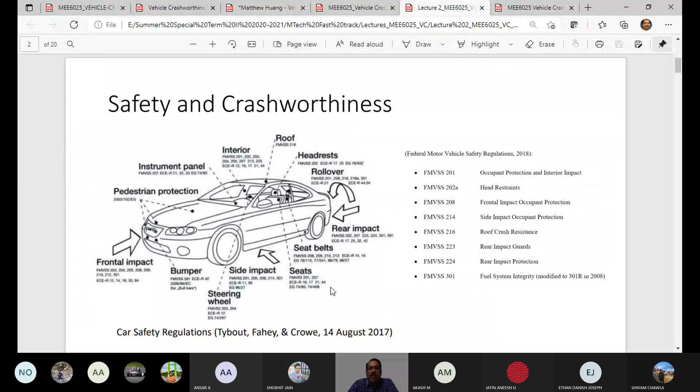And you see what crash tests are. Crash tests are guiding the vehicle with the required impact velocity, hitting the rigid barrier or deformable barrier. So you see in this figure, this crashworthiness test for government star rating, the star safety rating system for new model cars and trucks, formerly known as the New Car Assessment Program. So that is what we were seeing like this.

It was started in the 1970s in the US, and in our country we had this new car assessment program called Bharat Safety Program, implemented in 2017. We have different agencies, like ARAI is one part of it.

And you see also here side impact test, where your vehicle is held and then this barrier is forced to hit on it. So what is to be noted in this is the environment of the crash test. This environment has the instrumentation, high-speed cameras, and your vehicle is completely instrumented.

You would have dummies placed inside the vehicle, instrumented, and you see the responses measured in various parts of a human dummy that would reflect the severity faced by the occupant, and you would be able to calculate the severity index. I say these terms, but we will go ahead in our lectures on how they are calculated and so on.

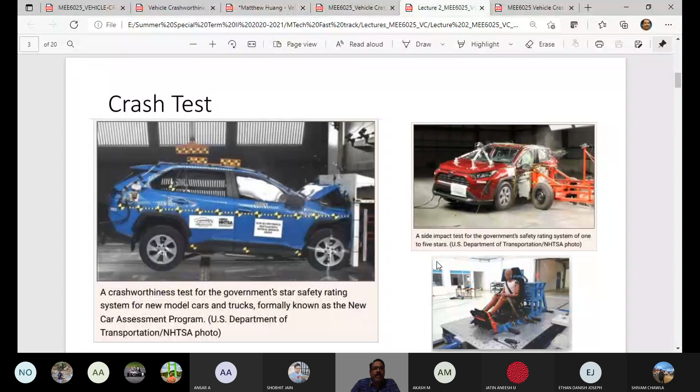There is the New Car Assessment Program, which I was telling you, 1978 was the first New Car Assessment Program, conducted by the United States. There are many other countries that also conduct their own New Car Assessment Program for new vehicles manufactured in their country. So we have the Bharat New Vehicle Safety Assessment Program. This started in 2017 and is still going on to realize its complete establishment.

So what is this Bharat New Vehicle Safety Assessment Program? It has been proposed as the New Car Assessment Program for India. Cars sold in the country will be assigned a star rating based on their safety performance. How is this safety performance evaluated? It is evaluated based on standard tests where ARAI has these test facilities mentioned. You can go through the website and see these facilities and their specifications.

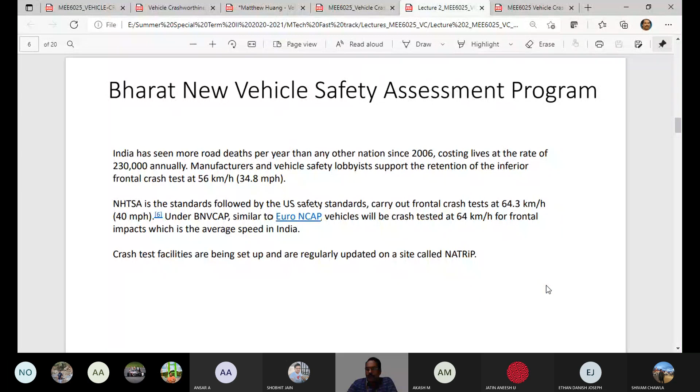One can take up such work as J component work and see this program's guidelines, how the tests are conducted, the test environment. So you develop your knowledge in that, and that would also be one of the topics for your J component assessment.

And when you come to vehicle collision models, why do we have to have vehicle collision models? To carry out such a crash test, facilities are required, and that would be possible by the government agencies. Also, OEMs can have that test facility. However, finally, the authority who is going to approve the vehicle for its safety performance during crash is these government agencies like ARAI in our country.

So most of the OEMs and other vehicle manufacturers do have their laboratory set up for component level testing, even for full car level testing, doing the test for internal purposes before taking it for certification. They do have, on the other hand, simulation facilities. And when you look at the simulation facilities, the vehicle collision models are quite interesting models. Many researchers have published articles, and people use their mathematical modeling for assessment of crashworthiness.

We will go through the vehicle collision models during our lecture. We have one separate module for that. We will see them in detail. I just have put it here to have a feel of what it is. So we can have linear impulse and momentum and energy principles from mechanics fundamentals.

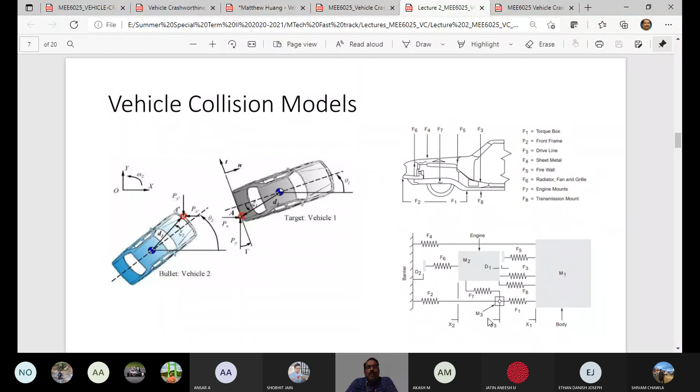Anthropometry is how the driver's physical dimensions and the vehicle dimensions are all arranged so that he would be comfortable enough to take the necessary action to avoid hitting a pedestrian. If the driver comfort is not there, if there are no appropriate ergonomics in your vehicle, then the safety of pedestrians would be a question mark.

So there are some aspects of pedestrian safety that we will be studying in detail, and these are the points we will be focusing on, listed here. If you look at pedestrian safety and ergonomics, you see the seating posture of the driver. You can see there are five here. Let's see one by one how they would be useful for ensuring the safety of pedestrians.

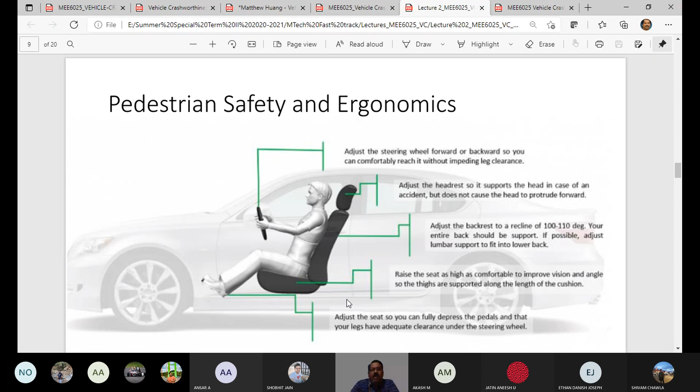I have just put these slides together from Google; I have taken many pictures and organized them for today's lecture so that it gives an overview of our syllabus. So you can see these crashworthiness restraint technologies. In a vehicle, these are all there.

In an advanced vehicle, you have automatic door locks. Once you start, it ensures that your doors are locked, so at any point of time, especially during a collision, your doors won't open and you won't be thrown out. That's very important, so automatic door locks are important.

Driver and passenger front airbags, dual level. Earlier it was only for the driver. Now it's made mandatory: the front seats compulsorily should have an airbag, so your airbag could deploy in an unavoidable situation.

And you can also see the passenger sensing system. So this passenger sensing system would be useful to see the surrounding environment of your vehicle. And you have here the rollover capable head curtain airbag. So airbags do not only come from the front, you also have them on the side of your vehicle, so that during side impact the airbags will deploy.

And you see on this top figure, the belts are the important restraint system. So as soon as you get in your vehicle, the first thing you have to do is put on your seat belt, and then you should start your vehicle. So these lap and shoulder safety belts are very important, and then the belt comfort guide. So these are pre-tensioner belts, right? And the energy management system. So these are all already available in the vehicle now, right?

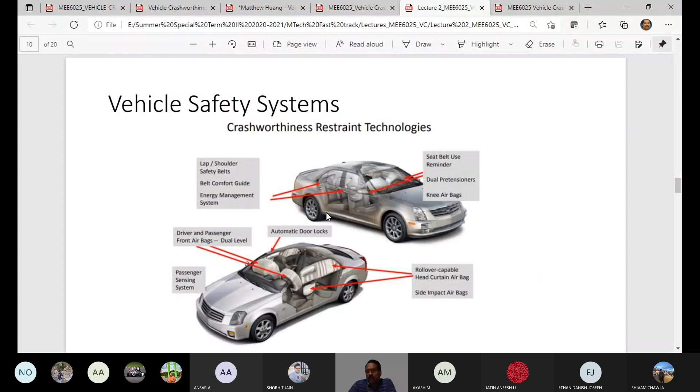So energy absorbing bumper mounts are there in the front, and the front crumple zone. So these panels would crumple, and they do not rebound. It is not an elastic deformation. This crumple is a plastic deformation, and they do not get back. So that means it is eating away the energy during the collision, and the kinetic energy which is transferred to the occupant, the driver, is very less. That energy is what we call the rebound energy, where with that same velocity the driver would be thrown forward during the collision.

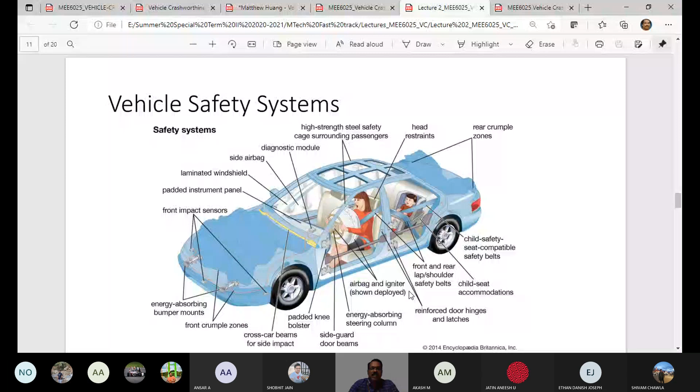And again, I have put this in a simple way: the important aspects. You have the crumple zone in front as well as in the rear, you have rear seat belts and front seat belts, you have side impact bars, and you also have airbags on the side and airbags in the front. That is not appearing here, airbags inside. So this is a simple passive safety system present in the vehicle.

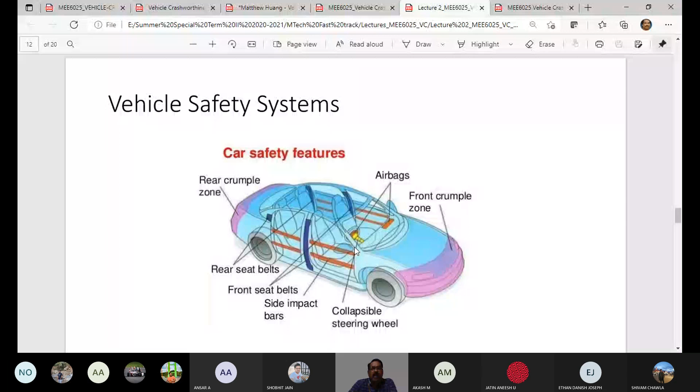So that's exactly what is there in this slide. You have pre-tension seat belts, airbags, and deformation zones. These are the three important passive safety systems present in the vehicle, and they protect the occupants of a vehicle and other road users if a crash occurs. They reduce the impact of an accident or the level of injury, and mitigate the consequences of an accident during and after the impact. So these passive safety systems are mandated and have to be present in all vehicles.

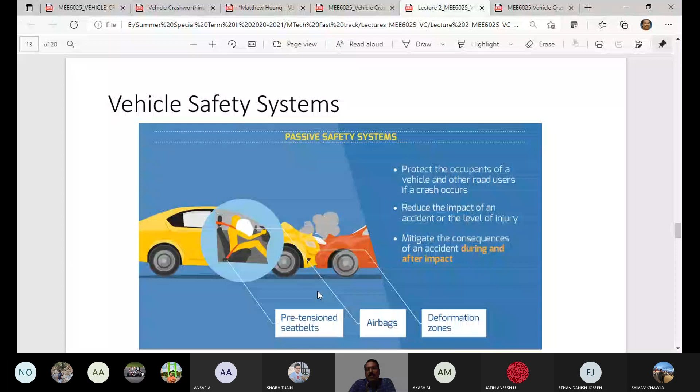Additionally, the other safety systems present are called active safety systems, which you can see here. What are those? Active safety systems give the driver more control in a dangerous situation, so the driver could have more control to safeguard the vehicle, right? You can see here there are monitoring sensors that constantly monitor the performance and surroundings of the vehicle. So you have sensor technology. You could see this in autonomous vehicles.

In high-end vehicles you have this, so that it always monitors what is happening in the surroundings of the vehicle. It can prevent an accident from happening altogether or actively help the driver reduce the impact, avoid or mitigate an accident pre-impact, so before it happens. That's the advantage of control systems and the advent of advanced electronics. Active safety systems mean whatever we have studied: anti-lock brake system, electronic stability control, autonomous emergency braking, and lane departure warning. There was a project done by a group last time using CarSim software. So these are active safety measures in addition to the passive safety systems present in the vehicle.

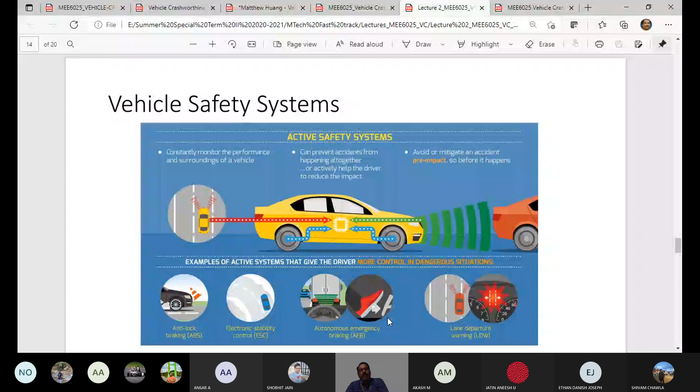And we will have another module on injury mechanisms. What are the injury mechanisms in a vehicle crash is what we have to see. Though we have these restraints, those restraints are controlling and minimizing the injury. So understanding what the injury would be and its severity is also required. You have many articles in medical journals; I have many samples downloaded. So if you are working on understanding injury mechanisms and the design aspects that go into restraints, you can think of taking that as your J component work.

If you look at this table, there are two columns: injury mechanism on the left and related injuries on the right. Related injury means how the injury is quantified. It is quantified by the soft tissues, the damage that happens to the tissue, abdominal wall musculature. So we need to understand the anatomy of the human body and which different parts of our body get injured. Neck injury is very common in collisions, and then spinal damage, and thoracic, that is rib and costal cartilage fractures. So it all involves fractures of soft tissues or bones.

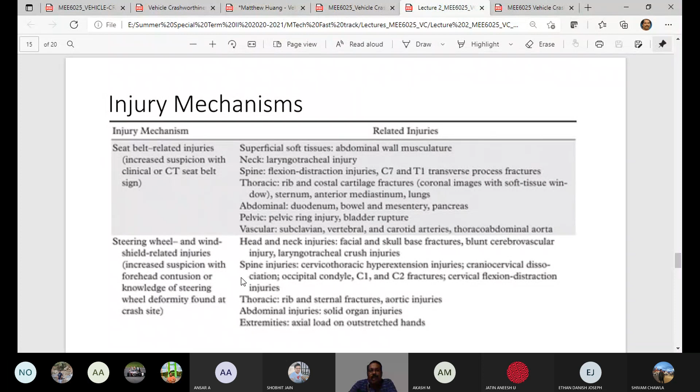So these are all some common injuries, and their severity depends upon what are the restraint systems in the vehicle and what is the injury mechanism. So that is one module that we have to study and understand. And you have dashboard related injuries. See, hip dislocation can happen, knee injuries can happen, and then floorboard related injury. That's all given here. So let's go through it later. I would upload this and you can read it.

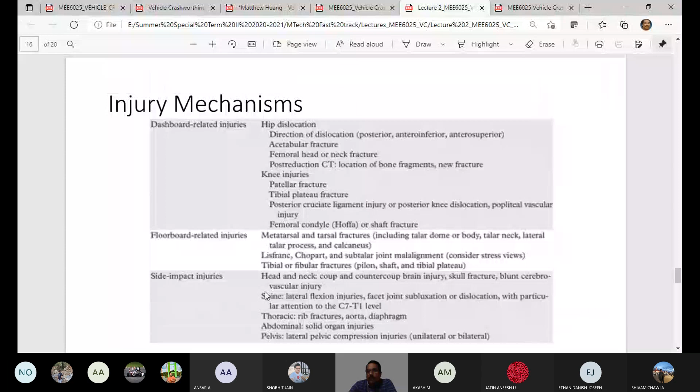And side impact injuries: what will happen to the different organs of the human driver during side impact. So these are all something that we have to focus on and understand clearly. And we have one module, introduction to test dummies present in the vehicle. So there is the development of these dummies. Early dummies may not have resembled a human, and today you have dummies developed which can completely replicate human behavior. So you have Hybrid II, Hybrid III dummy families,

and CRABI. So what is CRABI? CRABI refers to child restraint air bag interaction. So it's related to the airbag when it is deployed, is it protecting or not? Child restraint airbag interaction, that is what it is. So you can see here there is a child dummy, and you have dummies especially made for side impact. And if you search crash test dummies on Google images, you get plenty of resource materials.

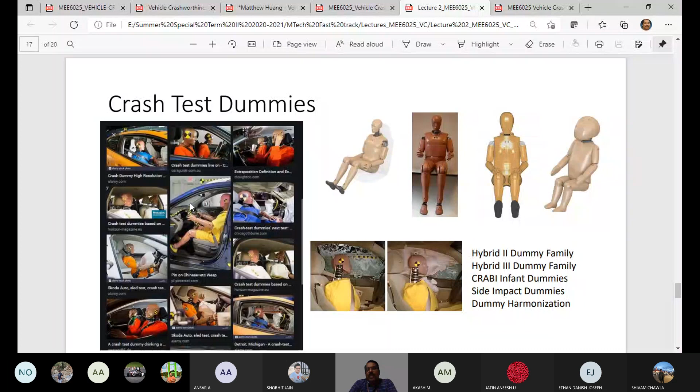So what is the world's best human-resembling dummy currently available, and its initial dummies are used. The purpose of these dummies in the crash test is to understand the dynamic behavior of the occupant, and these dummies also carry the required sensors to estimate the severities. How these severities are quantified, what numbers and values go with this, we will study in this module. So this is the last module of the course.

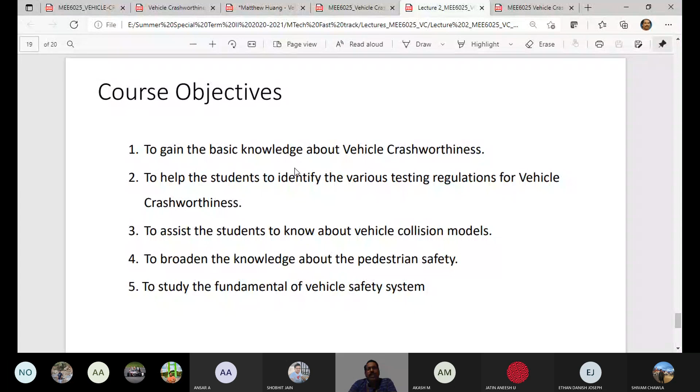So this entire course content, modules 1 to 8, is given with these titles. We had samples for each one of them, and we will get into details in our upcoming lectures. This course is designed with the following objectives: to gain basic knowledge about vehicle crashworthiness, to help students identify the various testing regulations for vehicle crashworthiness, to assist students to know about vehicle collision models, to broaden knowledge about pedestrian safety, and to study the fundamentals of vehicle safety systems.

Upon successful completion of this course, the student will be able to acquire and analyze the various testing procedures of vehicle crashworthiness. So you would have knowledge of different vehicle tests and test procedures. My delivery would focus on helping you get these skills. That's what I would keep in mind as I prepare my lectures from the textbooks. And students would be able to characterize the various vehicle crashworthiness mechanisms.

Students can develop a vehicle safety system for modern requirements, and use various injury mechanisms for evaluating vehicle crashworthiness. And students will be able to apply the dummies for different crash tests. So for which crash test, which type of dummies are important? What do you mean by dummy harmonization? There are many aspects, a lot of things.

So we will get into specific details during our upcoming lectures. With that note, I would stop today's class. Before that, let me just put this slide, and this would be for J component.

So you have the following topics as suggested. There are 6 topics that I will take care of in the content of the syllabus, and there are many articles and research papers available on these 6 topics. I downloaded many of them, so you can choose any one of this or your own interest, but that should confine to the course content what we have discussed today.

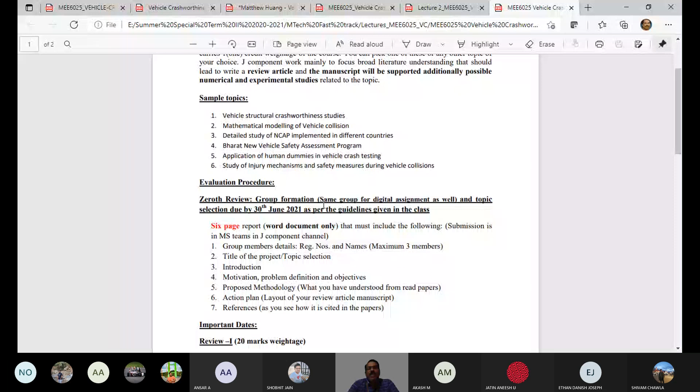So evaluation procedure is there, there is a 0th review. As time is not there, I expect that you work on this evening and tomorrow, and please come out with this initial report and selection of group members.

So maximum 3 members can be there. Since it is a smaller class, I would recommend 2 sufficient, but still if you want to make it 3 members, no problem, but not more. So we will have in our class maybe maximum of 5 groups, or at the maximum 6 groups, if 2 are there in a group like that. So it will not go beyond 6 groups.

I wanted that group, and then your topic selection, what is the motivation? Just to give an idea, how did you do for the vehicle dynamics course? Same way you prepare this and do submit it by 30th June, that is day after.

I should have clarity of members of the groups, right? And then important dates, review 1, it's an oral presentation. We will have that in this week, 19th to 23rd July. I don't require all the days because of less groups. We will have any one convenient date which will not disturb your learning of other courses or other course requirements you will be working on. So in this week, July 19th to 23rd, just before your midterm test, you would be having your oral presentation to exhibit your progress in your J component.